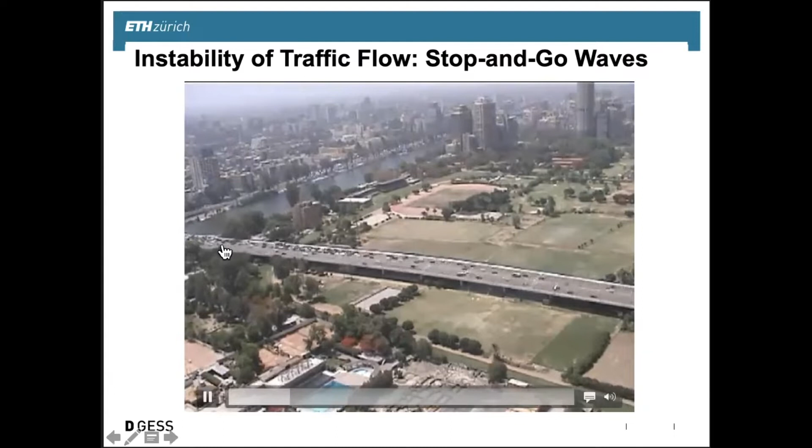So let's give an introductory example. What I'm showing you over here is a movie that I recorded in Egypt, actually. And what you're seeing over there is the spontaneous formation of stop-and-go waves. This happens over here. Let me see whether I can turn on the laser pointer.

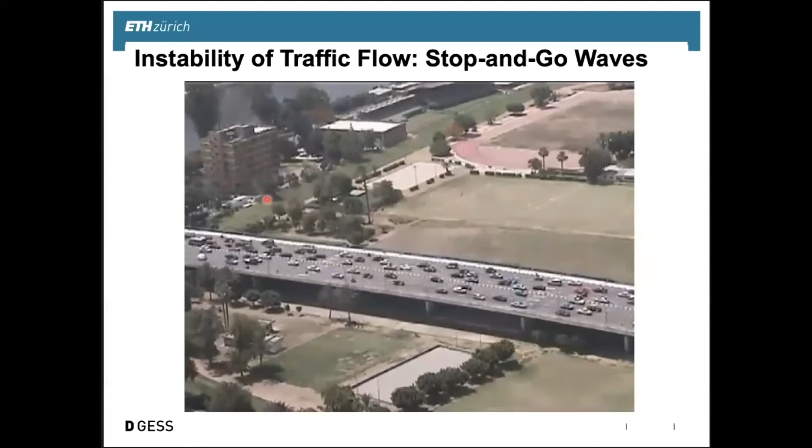So over here, you see there's an entrance, but there's no traffic light. So the stop-and-go waves are emergent. So now you can see it. In some places, cars can go, in other places, they're stopped. And this is always amazing to find, I think. All right.

And you know, before all the recording was possible, people were actually collecting data. That was a hard job almost, very difficult to put all of this together. As you can see, now, of course, times are different. There's lots of data, and you can do a lot more about it.

So what you see here is, in fact, the formation of a phantom traffic jam, where suddenly, you know, from one vehicle to the next, the speed goes down until cars are really stopped, and we have that stop-and-go phenomenon, right?

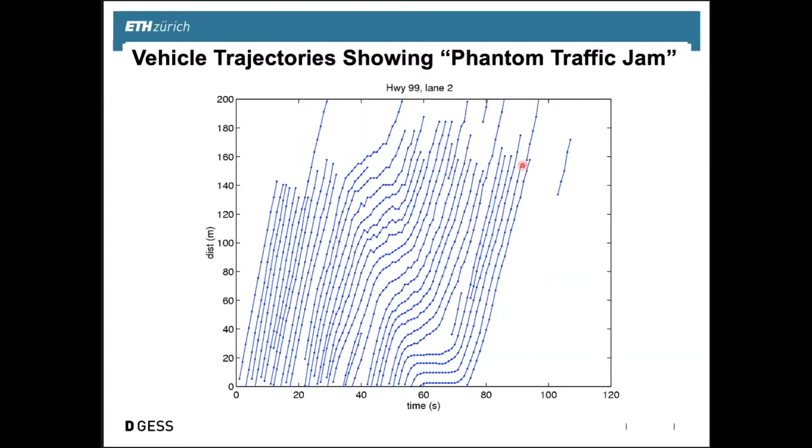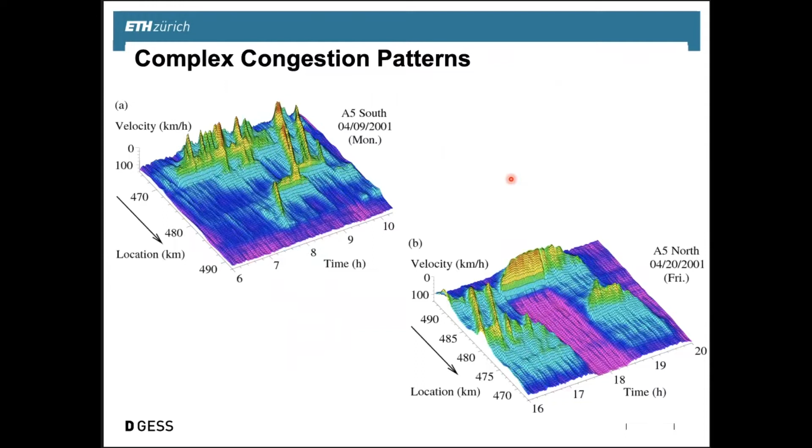So the idea that we pursued was that those complex patterns could actually be cut down into so-called elementary patterns that we hoped would be characteristic, and we could basically understand the complex pattern as a composition of those elementary patterns.

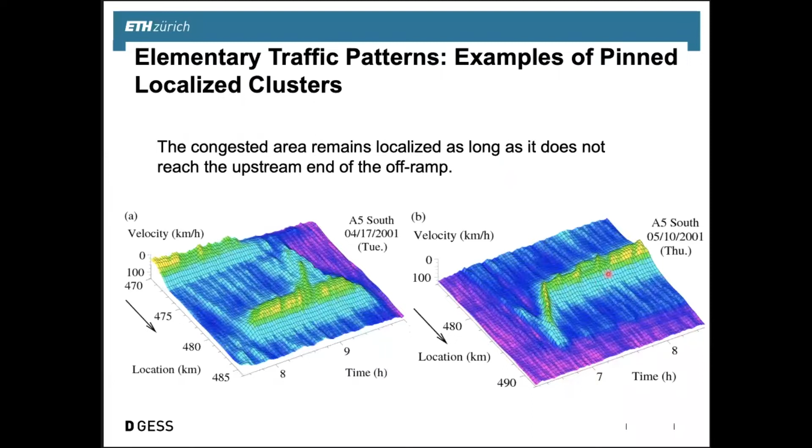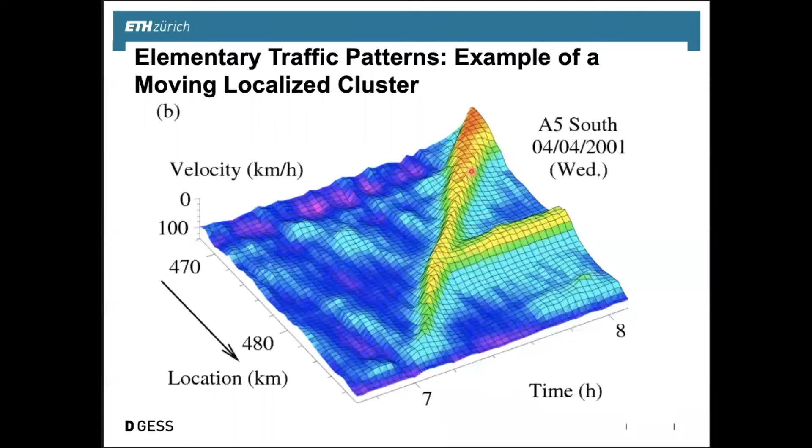And so the elementary patterns that we separated were basically those pinned localized clusters, where there's some congestion that doesn't move forward or backward. Then there is the moving localized cluster, that is a little traffic jam that moves backward, actually with a jam front which has a constant speed. It's minus 15 kilometers an hour, one of those interesting traffic constants to know about.

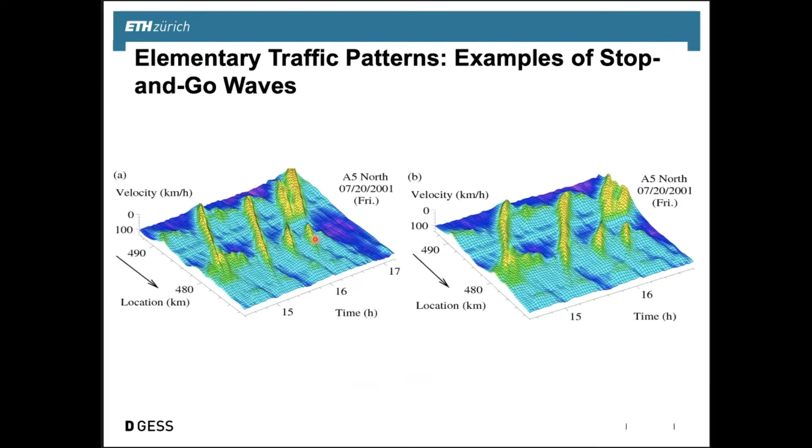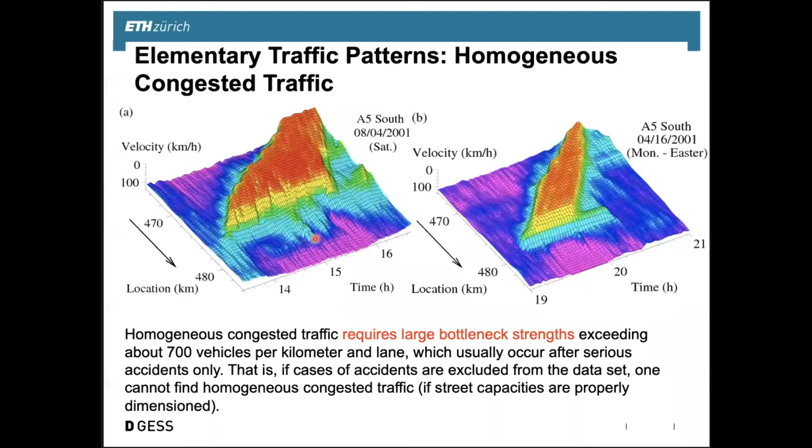And here you see stop-and-go traffic, and you can clearly see that those patterns are parallel, and that's because, again, this traffic constant of minus 15 kilometers an hour comes into play over here. That we call oscillating congested traffic, and finally there is homogeneous congested traffic, right? And all of these phenomena we'd like to understand based on traffic models.

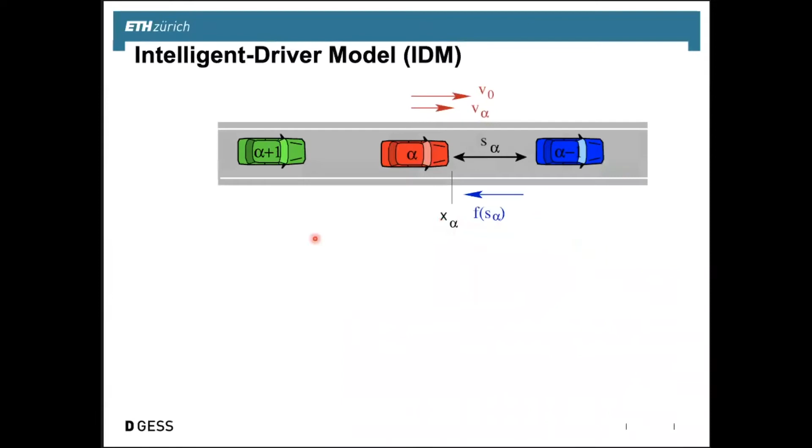And there are different kinds of traffic models. Among them, the car following models are maybe some of the more popular. And one of those is called the intelligent driver model. Like many of those models, it depends on the distance and speed of the neighboring cars, and relative velocities too in this case.

There's an equation of motion, there's an acceleration equation, and there is a certain relationship for this desired distance, which is a dynamic function that depends not only on safety parameters, but also, for example, on the speed and relative velocity, as you can see.

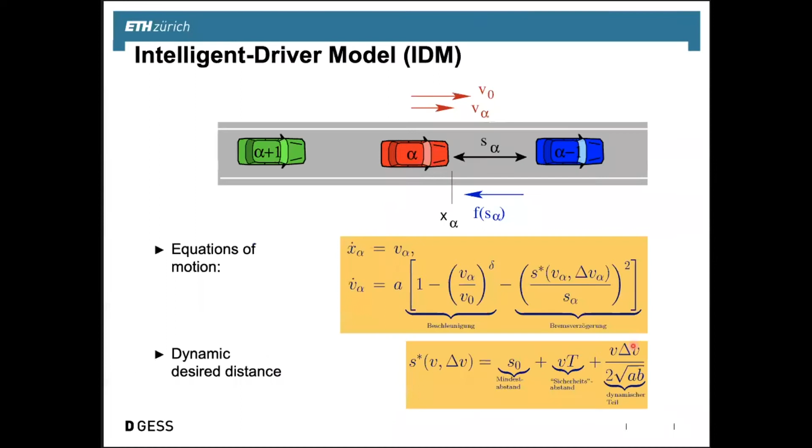Okay, back to traffic modeling and simulation. So what you see over here is the simulation of a simple car following model along the freeway. We assume actually a circular road of 10-kilometer length, and this is how things change in time. And you can see that even though in the beginning the density was almost homogeneous, after a short time, we see the formation of those traffic jams that have the characteristic speed that I mentioned before.

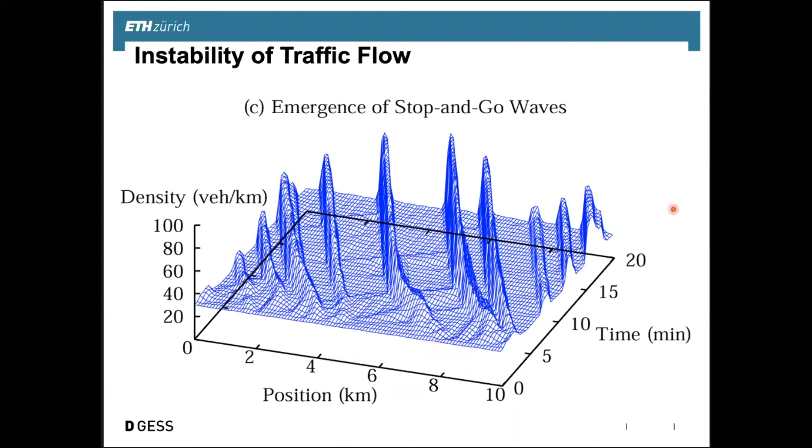So these are phantom traffic jams in a sense, right? So they seem to have no origin. So the reason for this is actually unstable traffic flow, and the slightest variations in the flow will actually amplify, and there will be a domino effect in a sense that makes everything worse until things happen that nobody wanted, which is a traffic jam, right?

Now, the traffic jam then moves backward because in the traffic jam, cars are stopped. They're flowing out at the front, they're added at the end, and so altogether that thing moves backward, okay?

Now you can see there's also the phenomenon of metastability of traffic flow. You see it represented both in trajectory presentation and in density representation. Small perturbations in that metastable density area will be fading away, while larger perturbations will actually be amplified.

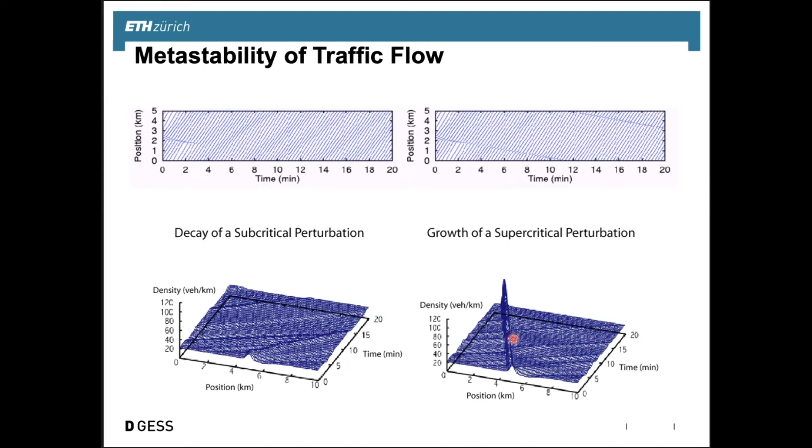And over here in this graph by Boris Kerner, you can see how things depend on the density. So basically for small densities, we have a stable state, which means that perturbations in the traffic flow will fade away. They will disappear. Then at some intermediate densities, we find unstable traffic, so that the slightest variation in the density will actually be amplified and will cause a stop and go phenomenon that I showed you before.

And then left and right of this, there are actually so-called metastable states where things really depend on the size of the perturbation. You have a small perturbation, so subcritical as we call it, it will disappear, while if we have a supercritical perturbation, it will be amplified. And that are the outcomes that you will then find, okay?

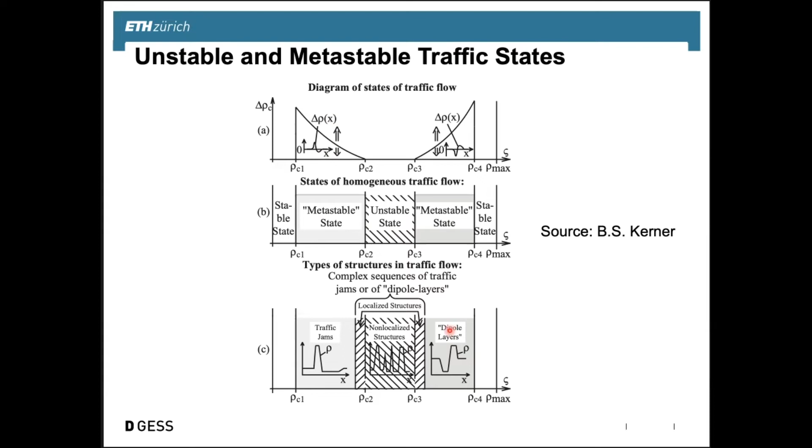Now, how complicated things can get, you see in this particular simulation over here. So what we're looking at is a freeway with an on-ramp where some additional cars get in. We're looking here at the situation along the freeway and in the course of time. And so in the beginning, we have apparently stable or metastable traffic flow downstream of the on-ramp. The density is somewhat higher because there are additional vehicles that came in, but everything is very stable.

Now, here, eventually, we are reducing the density temporarily. And we would think, well, that can't be bad, right? The density is reduced, so the traffic should even flow better. And for some time, it's like this. But eventually, that perturbation is changing its shape. It's growing big. It has already passed the on-ramp, but it returns, which we call the boomerang effect.

And then once it comes back to the location of the on-ramp, suddenly traffic breaks down, which means the capacity of the freeway has dropped. Then we find a backlog. It means a queue of vehicles is formed behind that location of the on-ramp. And on top of this, we also have oscillatory congested traffic, right? So there are a lot of things that happen just in this one single simulation.

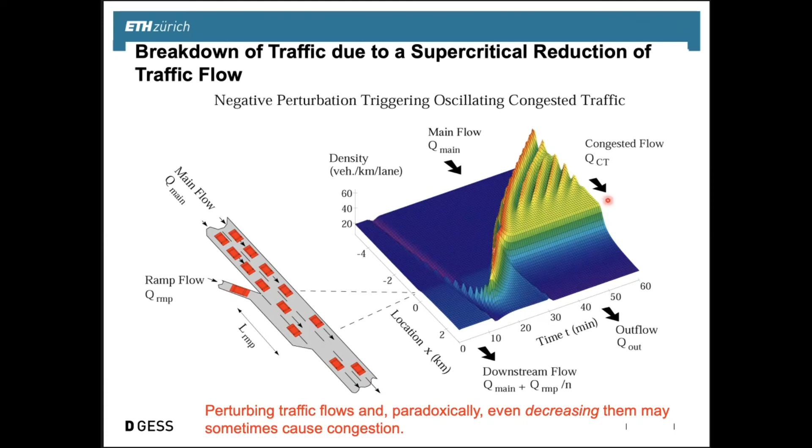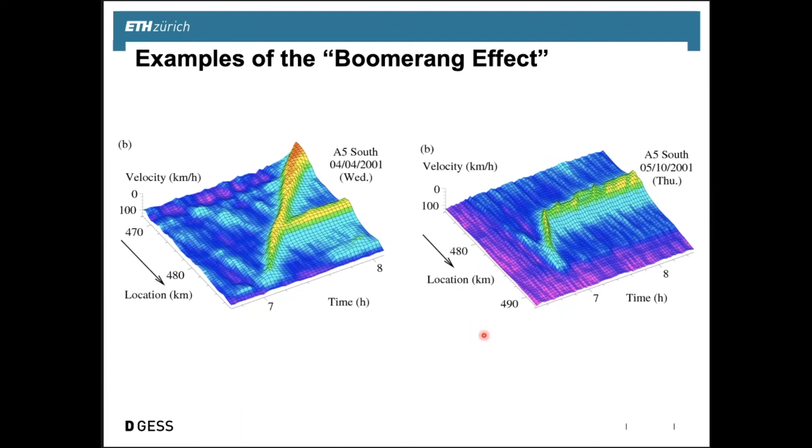And so this boomerang effect that I just described is actually found in many empirical examples. It turns out, however, that there's an additional thing that's going on. And here are some more empirical data about this. We can see that actually the perturbation grows only when it travels backward. Here, the amplitude didn't grow.

It's only, as we see over here in that representation, the spatial extension that grows in the beginning, not the amplitude. And only once we get close to this off-ramp, there's a perturbation of cars that are trying to get out of the freeway. This is finally messing up things such that there is a supercritical perturbation that will grow and travel backward, right? That's what you see over here.

Now, for a long time, we have wondered what is going on here. So you see two lines over here, right? This line and that line. We're interested in that line over here, the first line. So what speed does that front travel with? What's your hunch? It is 80 kilometers an hour. Now, after I've said this, do you now have an idea what's going on here?

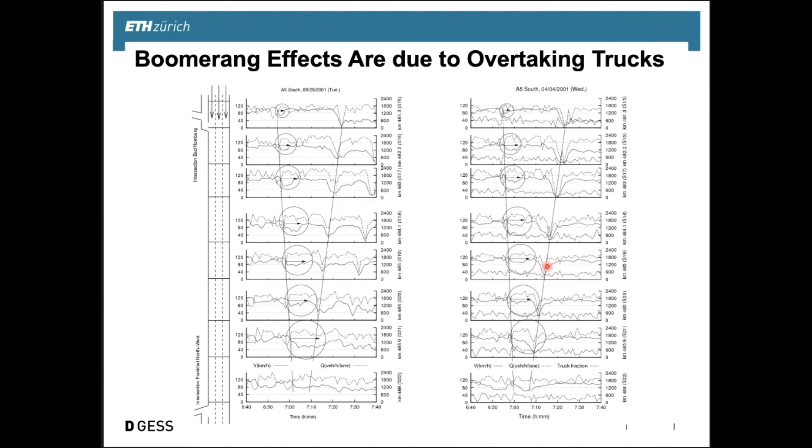So it's the overtaking maneuver of trucks that produces a large perturbation in the flow that is then finally triggering the traffic jam. And in other words, knowing this means that if we forbid overtaking of trucks at certain times of the day, we could actually produce fewer traffic jams.